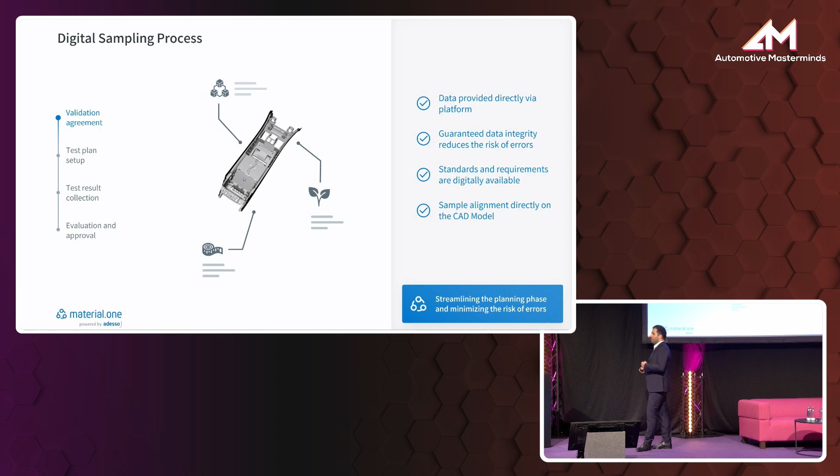So how does that happen, and what does that mean actually? When you purchase, from your perspective, one product with, let's say, one part number, which has a lot of properties and requirements, your supplier breaks that down into several subcomponents and materials, and purchases those from his suppliers as well. So through the supply chain, everything now is in place.

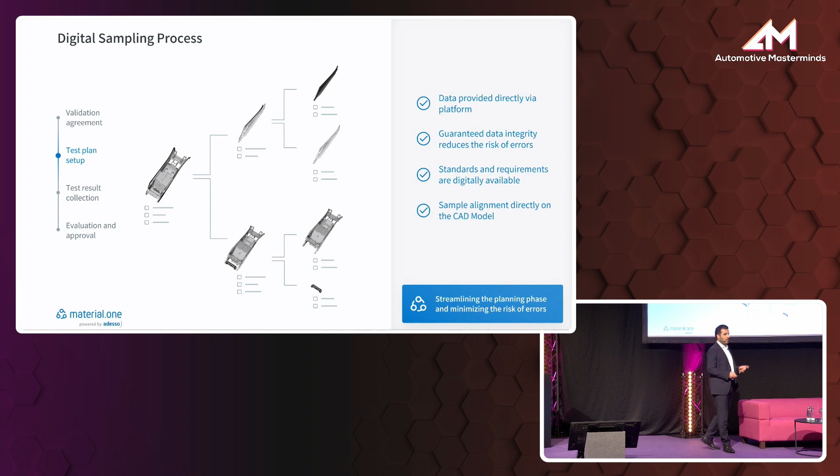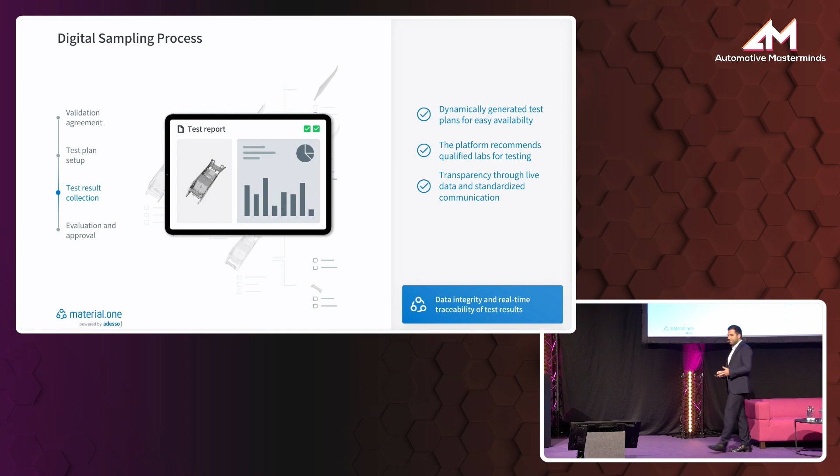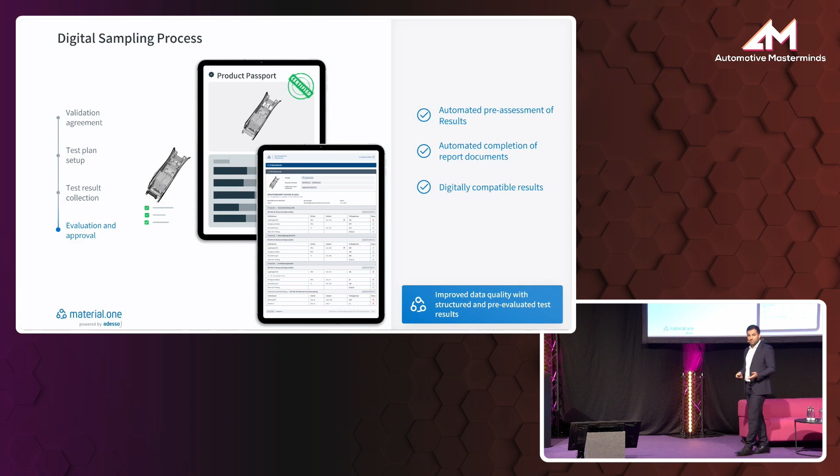Everyone has his requirements digitally and out of first hand. And so you get a whole requirement sheet, a requirement data set for your entire complex product. So what happens now is all the sub-suppliers are on the platform as well and registered. And they will now provide all those evidences and results back upward through the supply chain to you, and you just release them to your customer, say for an OEM.

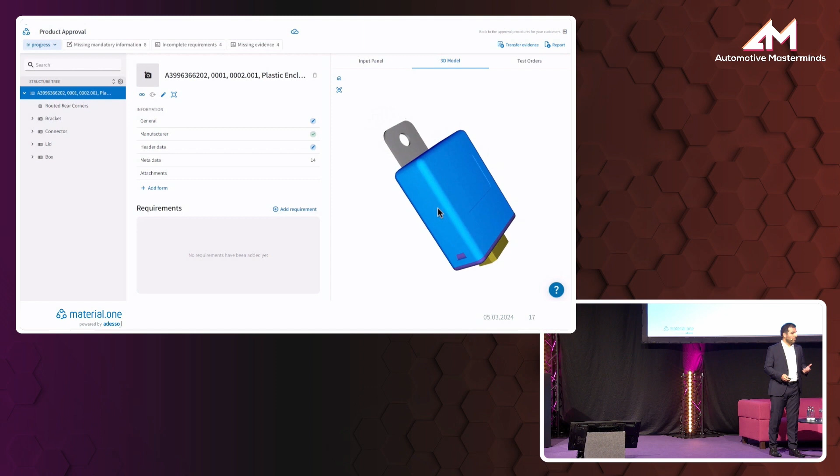And that's not a plan, the platform is already there. The bill of materials are being created automatically within 2 to 3 seconds. You get 3D data, you have all the metadata of the very last screw on the platform automatically. Nobody has to create that anymore.

So you got your requirements there. You can maintain them, you can change them, you can release them to your suppliers. You can modify them and agree with your customer on deviations.

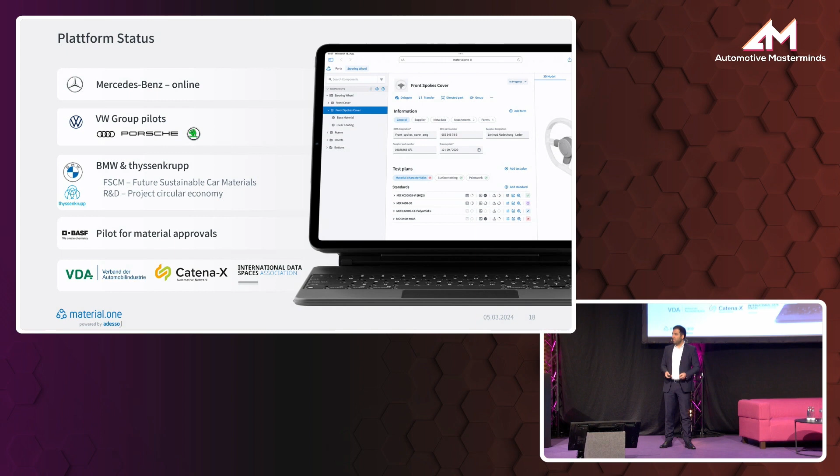Everything is there. So what's the status of the platform currently? Mercedes is up and running live with his suppliers. We've got the VW group running pilots for VW itself, for Audi, Skoda, and also Porsche. We've got BMW and Thyssen running research and development projects and future sustainable car materials on the platform. We have BASF running a pilot for material approvals.

The party is great. There are several more people in it, so just join us. You will have a lot of fun.

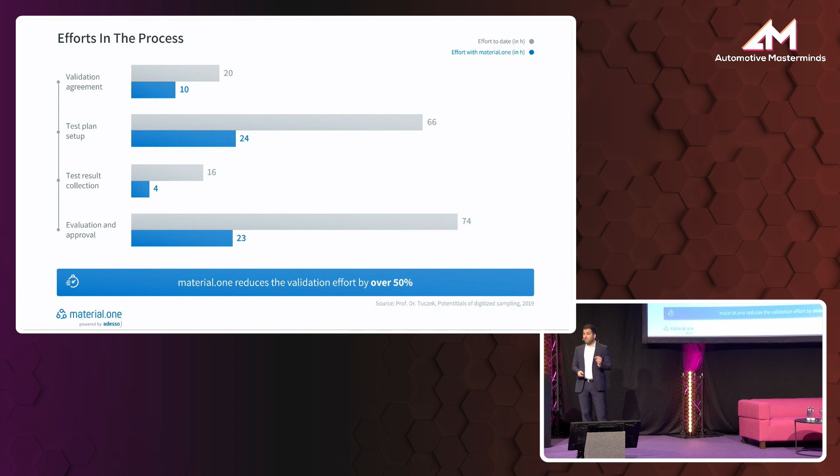Feedback from our users and customers on the platform is that we've cut down validation agreement by half. The whole test and validation setup plan, we've cut by two-thirds. The collection of results just happens on the fly. And when it comes to evaluation and approval, the platform already evaluates what fulfills the requirement, so you focus only on the ones which do not meet the requirement or deviate. So the whole data lake provides data analytics funnels to point you to the results so you can take action.

We all know about the advantages of digitization. The main thing is you just reduce the monkey business of your highly qualified personnel. And it's all data secure, TISAX certified.